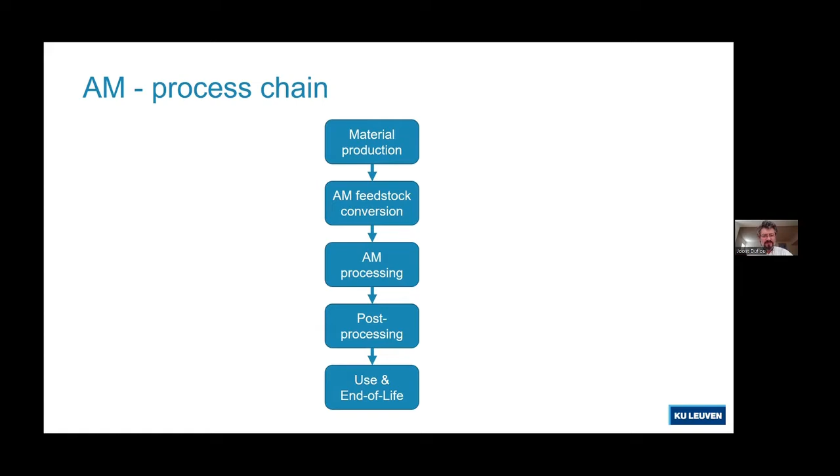And only at that moment does the real use phase come into the picture. Use phase is very much the virtue of the designer, of the application. End of life, you could say, well, we have launched parts, so we probably also have to take into account the end of life destination of those parts.

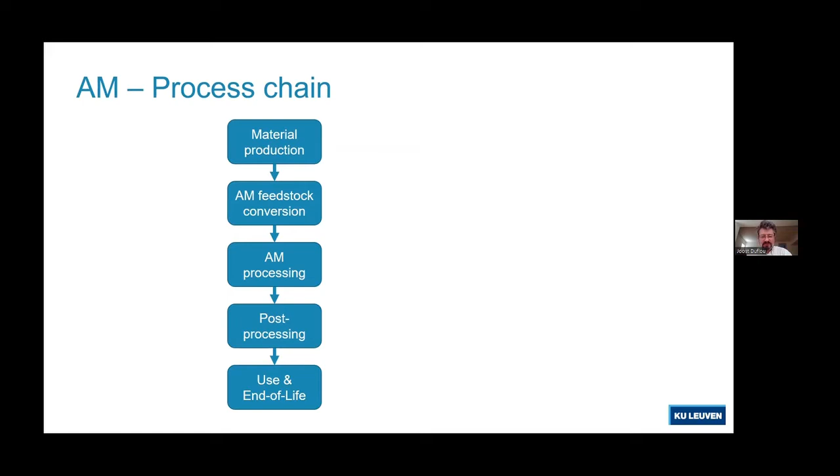When we have a look at who is to be addressed when we want information on these consecutive steps, or who could actually influence those steps, the bad news is we are spread over different responsible parties. We have material suppliers, and very often there are already a series of them, already a little chain in there. Then there's the actual additive manufacturing party, most of the time a single company. And then, of course, there is the end user responsibility.

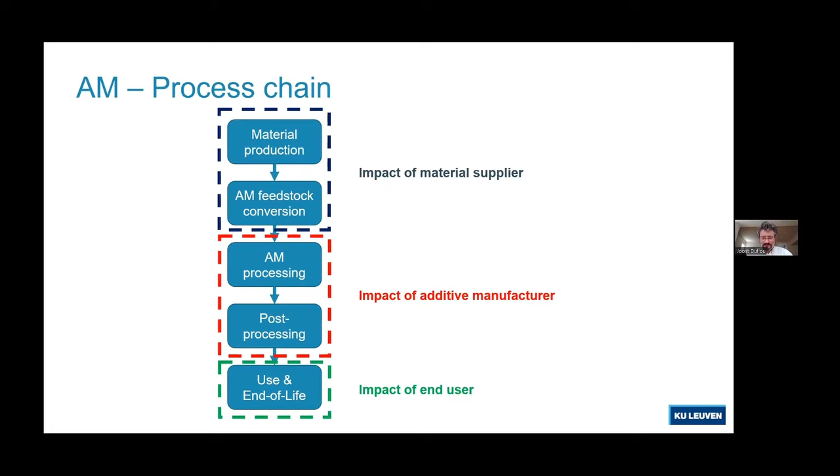Okay, let's have a quick look. What does that mean for the processes that we are interested in, and especially how easy or how difficult is it now to get proper information with respect to the impacts that may be caused in these consecutive steps.

First step, the material supplier. The bad news is that this is a very intransparent sector. You can get a price offer, yes, you can get material properties from these players, but if you want to know what is, for example, the energy intensivity of their production, if you want to know what is their efficiency...

...the news is that it is basically very difficult to convince them to open the doors. What we do know, and this is very much in contrast with a lot of studies that are being published, it's definitely not as simple that a kilogram of material and a kilogram of, for example, powderous material would be more or less the same thing.

The yield of turning material into fine-grained particles with very specific dimensional requirements, and also when we are talking about the sphericity of these powders, AM players are extremely demanding there. And the bad news is that in the production of these powders, a lot is being lost. Very often we are talking about yields of just 10, 20, 30%. And even worse news is that sometimes the non-usable fraction cannot even be properly recovered, because of high oxidation, for example. It's not as simple as just squeezing it back into the chain. So this is quite annoying, and as you will see further on, this does influence our footprint quite significantly.

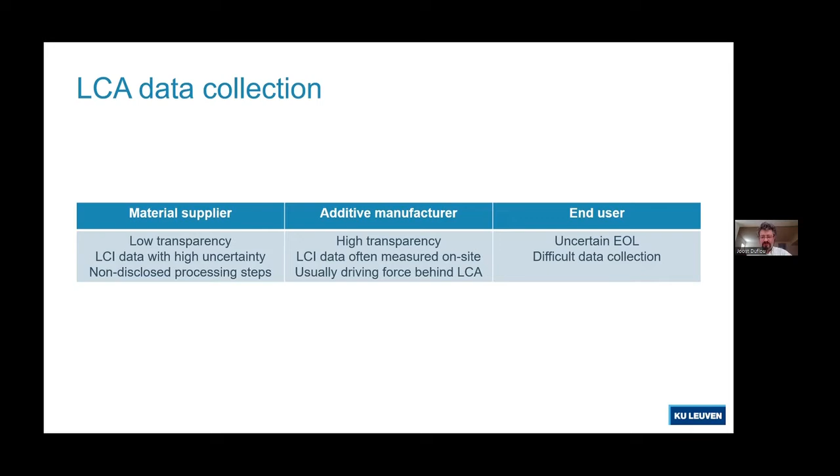Then comes the end user, and I think we have seen some really nice examples of how additive manufacturing facilitates improved, well-optimized designs. Yes, we can save weight in aerospace components. Yes, we can optimize the fluid dynamics by having, for example, cooling systems completely tailored to the actual cooling demands. So as a result, we can make components and systems that are fairly efficient in their use phase, but that's not what the process is doing. That's basically what the design is influencing.

Zooming out to the processes most commonly used under the label AM, we have fused deposition, SLM, and SLS as the main categories. While the process chains are a bit similar, except for material preparation, in fused deposition we need filaments, typically from polymers. There is some tendency to try this also with metals, since fairly recent developments in this sector. We see powder manufacturing from metals for SLM, and for SLS similar thing with polymers. So all the rest seems fairly similar.

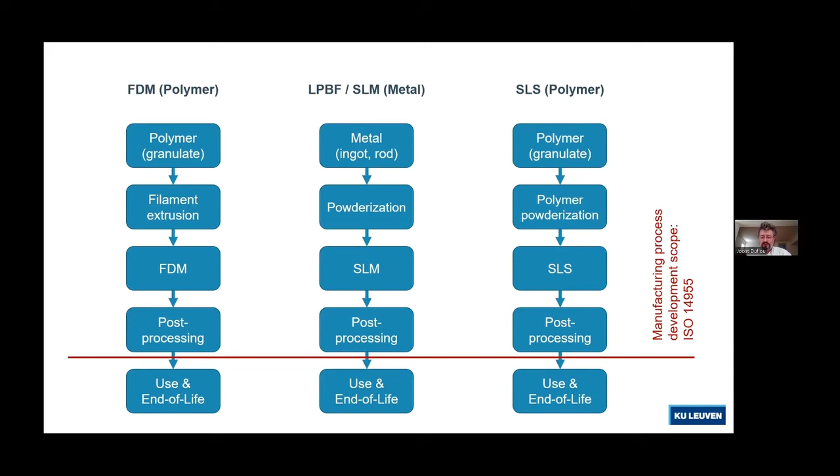Now, for the rest of my presentation, we'll just squeeze out this use phase. We'll focus on the part where we have an influence as manufacturing players. The chain itself is a little bit more sophisticated than just a linear chain.

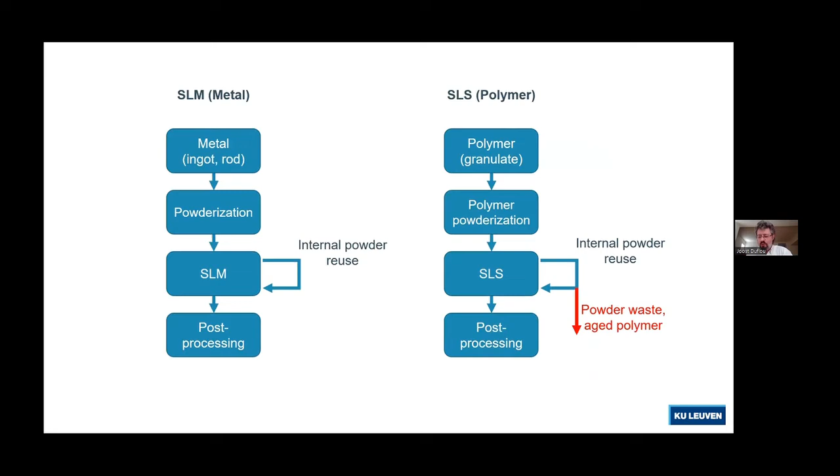Why? Well, indeed, there are possibilities for reuse of powderous materials, especially in SLM. Very fortunate that this is the case, otherwise the impact would be much bigger. And then we have the polymer case, in which situation we actually do have a fairly significant waste stream, and that one I'll document a bit further.

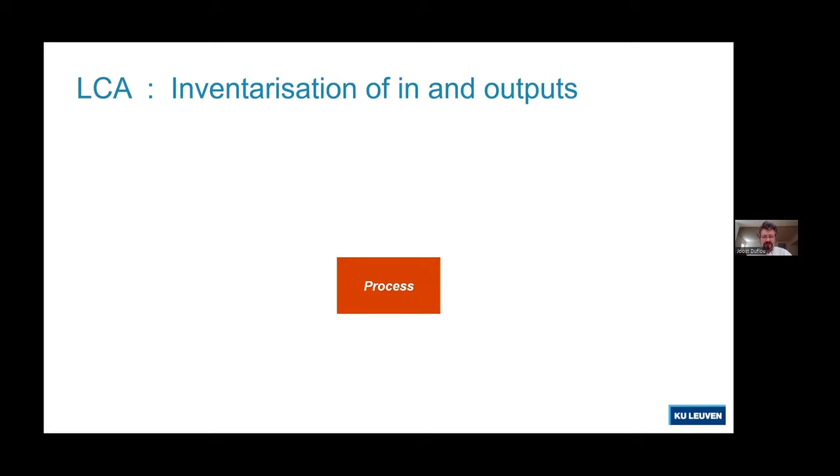Okay, how do we now quantify this impact that we want to objectively make object of our discussion? We use LCA techniques, as has been mentioned before. Perhaps a very short introduction: what do we do to achieve that? There's a lot of things happening behind the scene before you first get your output data reported, as in the further slides. We look at the full material flow, the input material and the product coming out.

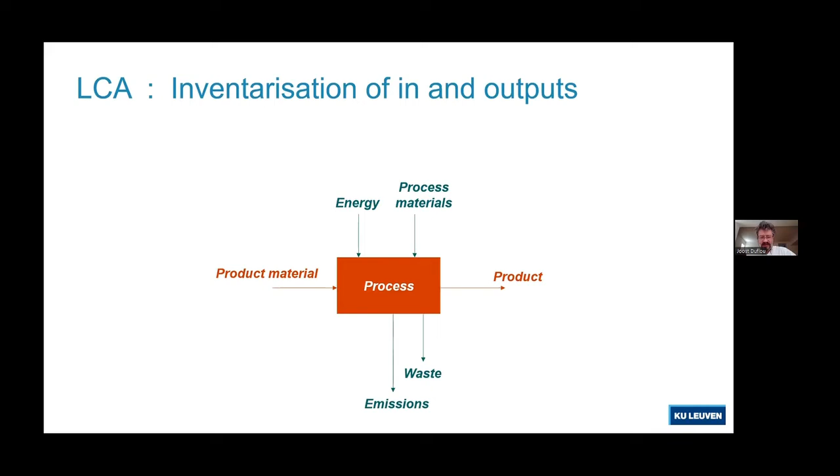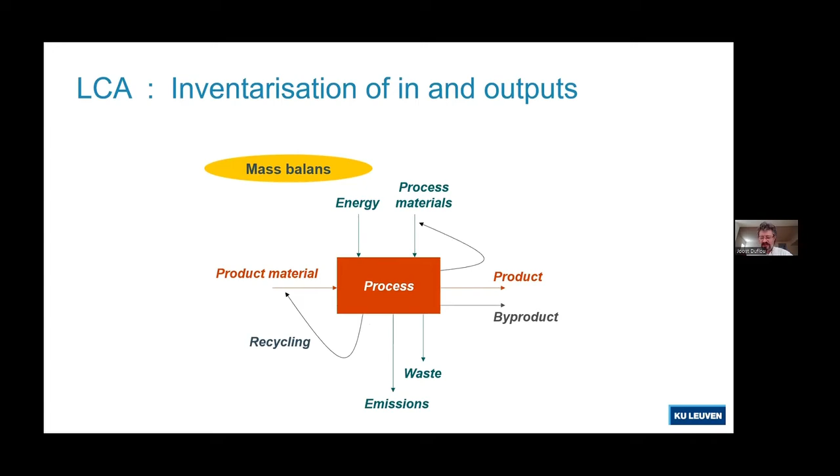We also look to unwanted effects like emissions and waste. We do have to acknowledge that sometimes we use process materials, for example protective shielding gases, and of course there's the energy input. Then there are streams that are a bit more difficult to quantify. What do you do with byproducts, non-wanted products, but that may still be useful? What about the recycling of some of these streams? All of that is taken into account, and we make sure that we have a correct mass balance. Everything that goes in ever has to come out. So that's part of the rules of the game.

Then when we have all those streams, we try to link them to impact categories. And I am aware that some of you are really very much fascinated by CO2 equivalents, by global warming. Why? Because it's a strong societal trend. But we have seen several times in history that there are shifts, there are fashions in this impact attention. Some years ago, acidification, for example, was important. So we shouldn't overlook the other effects than global warming.

So how do we systematically measure these effects? Well, we look to all the streams and we translate them into equivalent streams. We know that CO2 contributes to global warming, but we also know that methane does the same and not to the same extent. So there are conversion factors, and then we can make simple additions, how much global warming potential, how much contribution to acidification. That's what we call classification and characterization in an LCA.

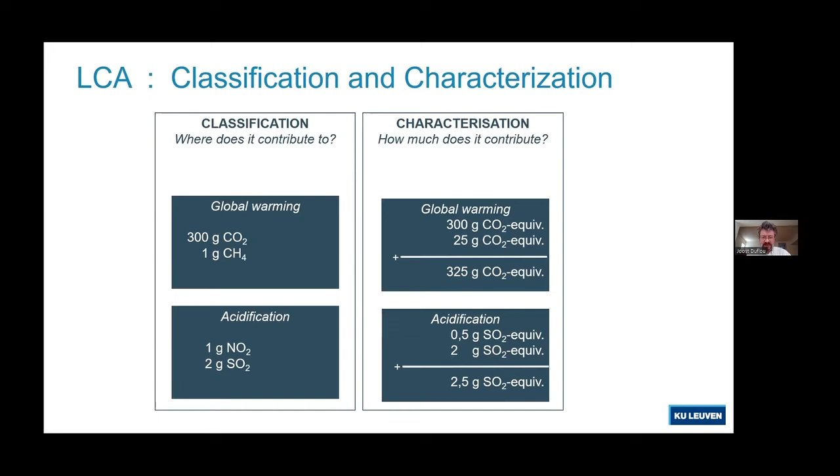I'll spare you the little details, but there are lots of different impact categories. Typically, if you want the scientific content of an LCA, you have to look to these midpoint effects. We know that there is ozone depletion, we know that there is warming of the atmosphere, and there are so many other impact categories. But when you look at it from a societal perspective, basically we are not so much interested in the mechanisms, but more in the final effects.

And the final effects are three different types of impacts. We are interested in human health, expressed in disability adjusted life years. We are interested in ecosystems, the disappearing of species. And we are interested in the long-term availability of resources, so resource depletion is another important category. And of course, those are categories of totally different nature. If you want to bring them together to a single score, which in the end we always like to have because we like to compare different things, well, you will end up having to choose a weighting scheme.

Which one is more important: human health, ecosystems, or material depletion? It's a very difficult question to answer, and depending on who you ask, there are different categories of people in society, so you can only make an average based on statistics from sociologists.

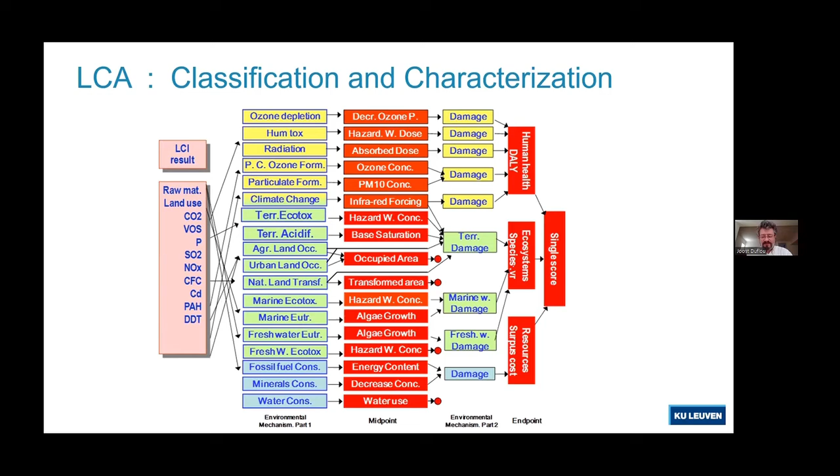That's how an LCA works, and that helps explain how we get to graphs like this. This graph is expressed in eco points, endpoint impact measured with the CML or ReCiPe quantification method. I'll save you the details, but that explains how we get a single score for different aspects of our manufacturing. For fused deposition modeling, the toothpaste technology, you can see it's quite simple.

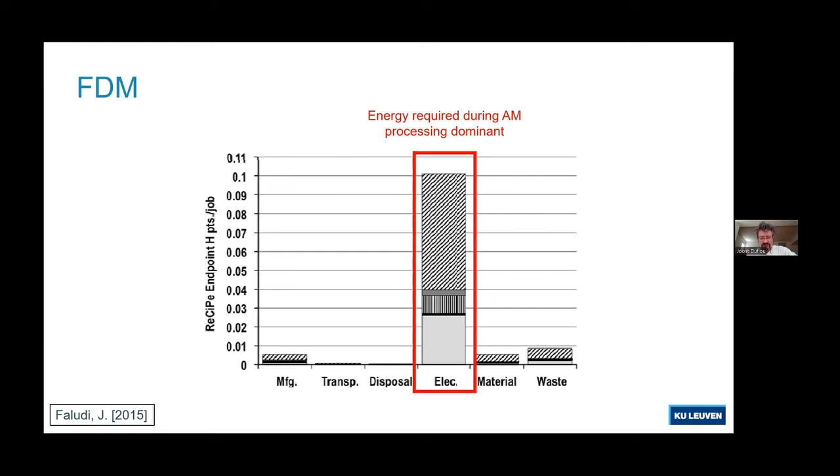It's the electricity demanded by our systems. Our fused deposition machines are fairly slow. You know how long it takes to build a part, you easily spend a few hours, and processing over 24 hours for large parts is not uncommon. So the fact that this is so slow, with so much overhead in the machine, explains how we get such a big impact from electricity consumption.

Simple conclusion, easy to find out what we can do about that. How about the other processes? When we look into SLS, the picture is totally different. The SLS printing itself, the consumption of the machine, I wouldn't say negligible, but it's an order of magnitude smaller than the input powder.

We took the example of the most commonly used powder, polyamide 12. You can see that the powder, as it arrives at the premises of the AM manufacturer, already has a big footprint, and the inefficiency with which we use this powder is very much responsible for this huge impact.

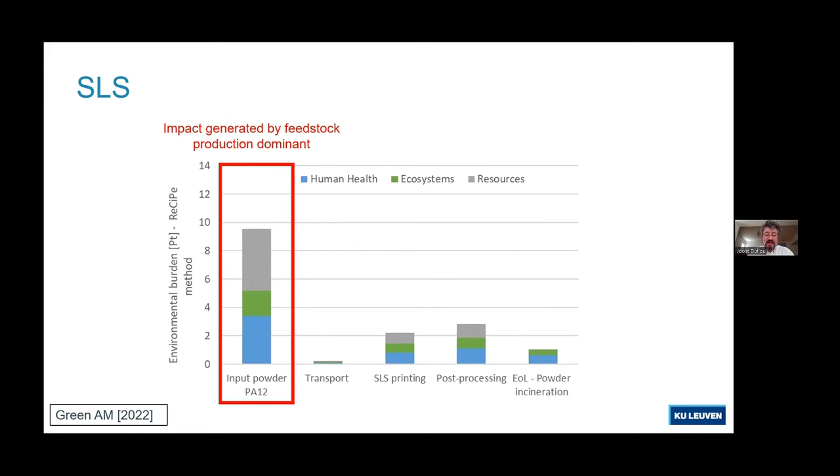If you split it up further, you can see in more detail that the SLM process at the top, the actual making of the part, and the material production and atomization both together contribute a similar order of magnitude that is by itself already bigger than the process demands.

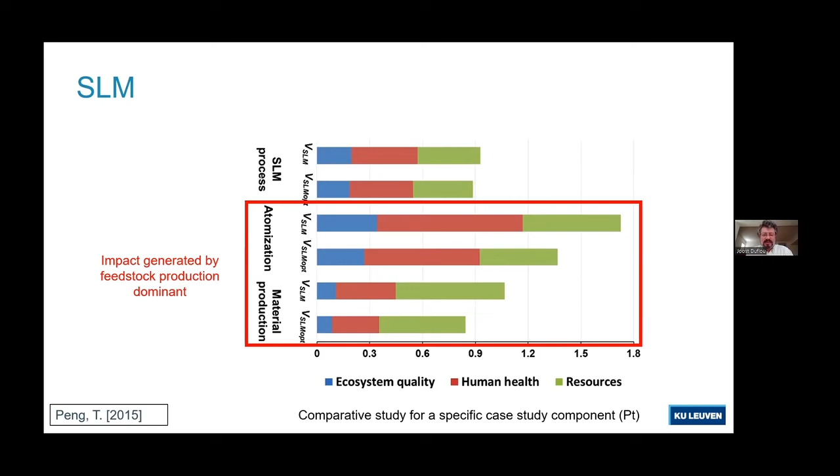The atomization, as I told you, is an inefficient process demanding a lot of recycling. With polymers it can be done, but this is already the case here with SLM, so this is material production, the metal production. When we're talking about titanium or stainless powders, the yield there is really not so good, and this explains why the atomization is actually so demanding.

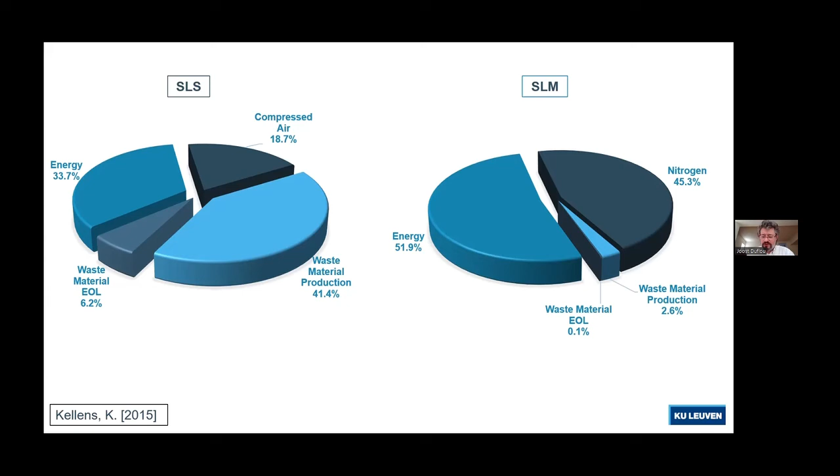Lessons learned: when we look to fused deposition modeling, it's basically the machine energy efficiency. Can we make faster machines? Can we avoid energy losses, heat losses for example in the extrusion nozzle? It's a technical target to reduce the energy demand.

When we look to the powder-based processes, it's very much the feedstock we have to focus on. That means we have to work on the suppliers. Waste polymer powder is a problem for SLS, and I'll hand over the estafette stick to Tom Craeghs afterwards, because we are working together with Materialise on some strategies to improve the efficiency there - how can we make polymers that are less sensitive to clocking together, to changing their structure under the influence of the high temperatures we process them at in the AM process chamber.

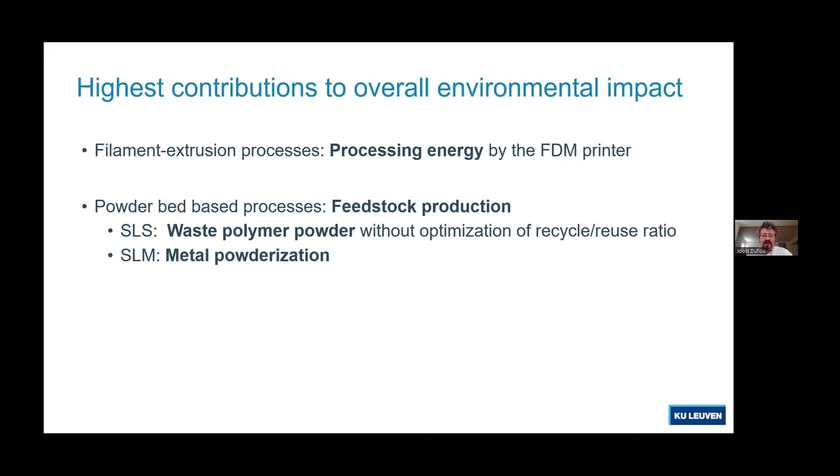The SLM process, that's even more difficult. There, the powderization is the big bottleneck, and finding better processes for gas atomization is of course a totally different task than improving the machine tools for AM themselves.

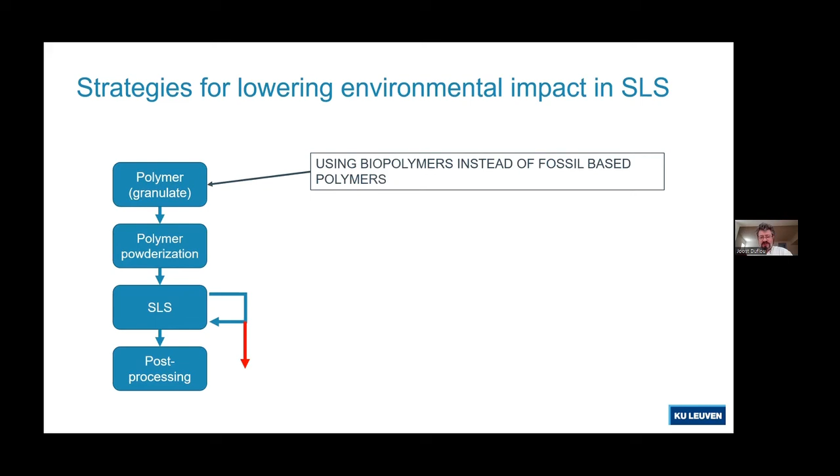Okay, so just to give you a glimpse of the different strategies that we are currently working on. For polymers, I'll show you some quick early results of strategies to switch to biopolymers. How about the powderization process itself? Can we perhaps think of less demanding materials, filler materials? Would that structurally change our parts drastically?

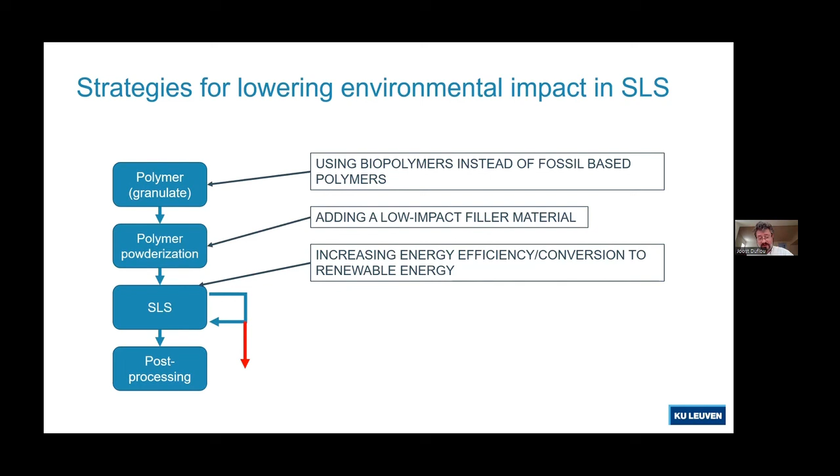The energy efficiency, the conversion that we are actually making - we are not consuming energy, we are just transforming it in our processes. But could we lower the footprint by the source of energy? Of course, that's an obvious one.

The powder reuse rate is an important strategy that's fully under control of the AM manufacturer himself. And then, of course, what we call waste - is it really waste, or can we think of industrial symbiosis? Can our waste be a direct input for other processes that are less demanding, that do not need this high sphericity, for example, of the powder?

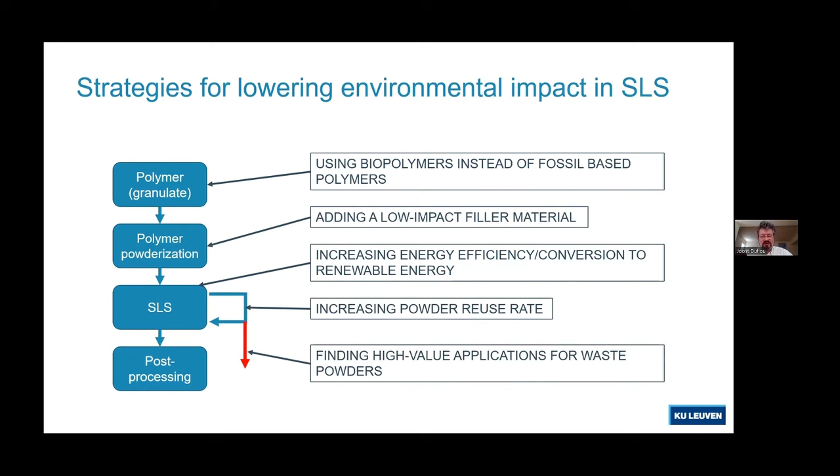A quick glimpse of first results as a handover to Tom. We have been testing together with Materialise different variants of polyamide, switching to polyamide 11 based on some biopolymer.

We can see that indeed for some of the sensitive impact categories, like to the left, climate change, global warming, the CO2 equivalents, also the fossil depletion to the extreme right - for those impact categories, we do have an improvement.

The bad news is that for all the other impact categories, we actually see that this biopolymer is less performant, has a bigger footprint. And you can understand that if you know how much effort has to be done to grow the materials underlying the biopolymer - the land use, the water use, the toxicity of the fertilizer, and all the protective measures that farmers have to take against rodents and insects. All of that contributes to impact.

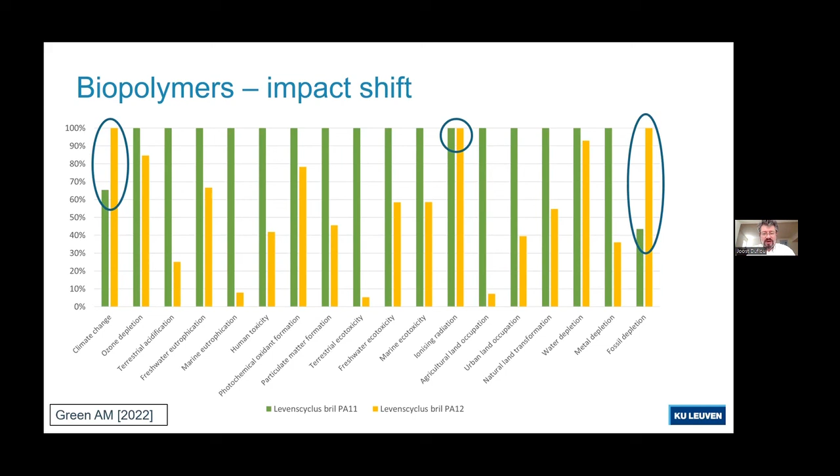So if you focus on only CO2, this looks like an improvement, even a significant one. If you look to impact in total, it's basically not. That's the bad news - biopolymers by themselves do not really help.

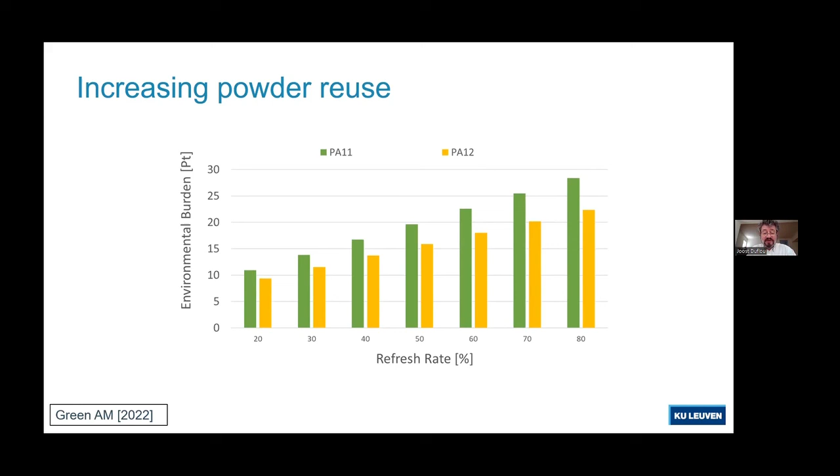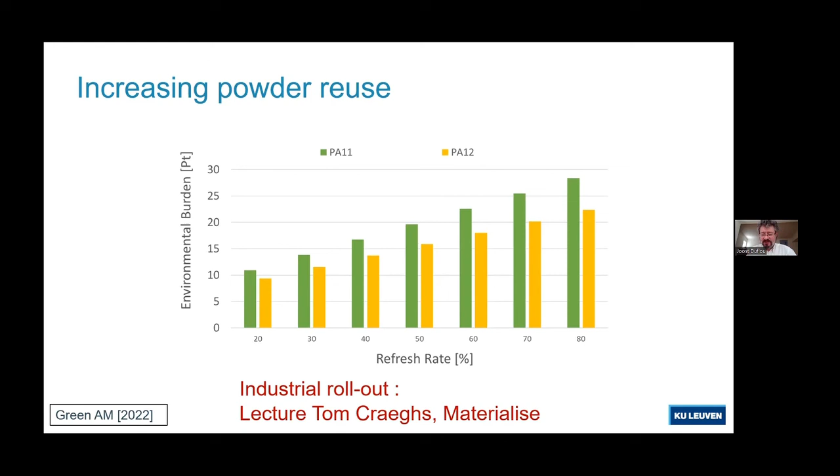With that, I'd like to hand over to Tom, who will explain the strategies that Materialise is developing for further lowering their footprint as a major producer.